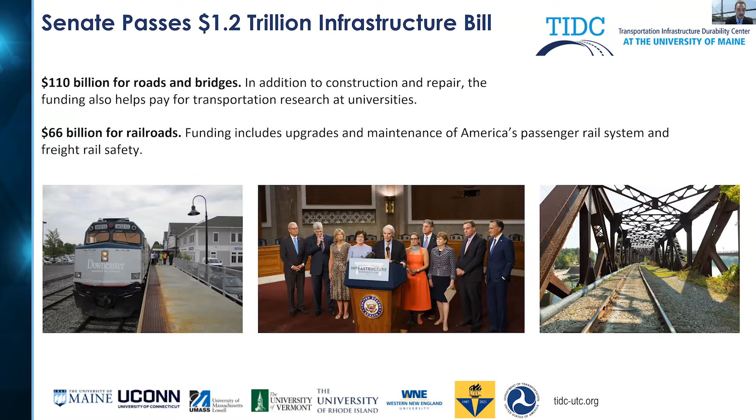As you all know, the Senate passed the $1.2 trillion infrastructure bill. As part of that, there's $66 billion for railroads, which would include upgrades and maintenance of America's passenger rail system and freight rail safety. Senator Susan Collins was key to doing that and getting a bipartisan group to move this infrastructure bill forward. So hopefully a lot of good opportunities for both roads, bridges, as well as the railroads as we move forward.

Our program today starts at 9 a.m. and ends at 4 p.m. Following my introduction about the conference itself and the work that the Transportation Infrastructure Durability Center is doing, we'll have a keynote talk from Sean Woody, on the FRA Railroad Research and Emerging Research Needs. Following that, at 10:30, we'll have a session on needs and challenges for the railroad industry. At 1 o'clock, we'll have a keynote speaker, the Deputy Commissioner for Con DOT, to talk about the future of passenger rail in Connecticut. At 1:30 p.m., we're going to look at a forensics and technical advancements panel on the railroad industry. The last session at 2:45 is on solutions and opportunities for railroads in the New England area. And then finally at 3:45, we'll have some closing remarks.

As we all know, all transportation infrastructure industries are facing unprecedented barriers as well as opportunities, particularly with the new infrastructure bill. But as part of that, the railroad is seeing significant challenges. We hope that this symposium this year and in future years will help focus the light on the needs of the railroad industry in the Northeast area and help us all work together to try to resolve some of these issues, both researchers, industry, as well as the railroad owners.

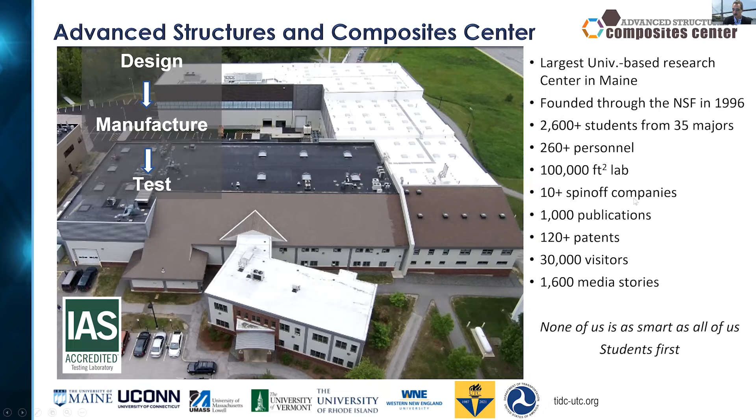Our strategic plan developed in 2020 is called GEM, and it's focused on green energy and materials. So our goal is to bring green energy and green materials to our region, to our country, and to the world. So we look forward to working with you on the railroad side to try to get there.

Examples of technologies developed in our laboratory recently is called the G girders, or the genius girders, if you wish. And this girder has been designed using life cycle in mind. Rather than designing the lightest girder that you can, or the largest bridge system that you can, we really looked at the entire life cycle from what does it take to fabricate the girder?

What does it take to transport it to the site? How do you erect the bridge system on the site? How do you maintain it during its lifetime, and how do you work on removing it at the end of its lifetime?

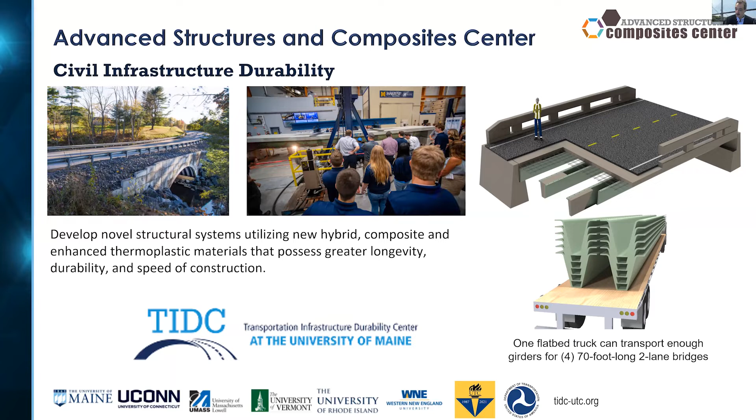The girder has been commercialized right now, and there's a company in Maine, Advanced Infrastructure Technology, that's building these girders and shipping them across the country.

Let's focus a bit on the Transportation Infrastructure Durability Center. That's a federal highway funded research center in Region 1. That's the center that includes the different states, the Northeast states, New England states that you see here.

And the center has currently 53 active research projects across all states, across all universities in the states. We're very keen on working with industry and meeting DOT real needs and taking technologies out of the lab and into the real world.

So we're very pleased that every one of our projects has a DOT technical champion, every one of the 53 projects that works very closely with our researchers to ensure that the research is heading in the right direction, and it has practical uses that the DOT can take away from and implement in their infrastructure systems. So that's a different way of looking at research.

This is where the customer of the research is embedded in the research process from day one to ensure that the results achieve their goals.

The Transportation Center is conducting transformative infrastructure durability research in 4 different research thrusts. The first is monitoring and assessment. So it's very difficult to figure out how you can enhance life if you don't know what you have, what the infrastructure looks like. So we're looking at next generation methods to assess the current infrastructure.

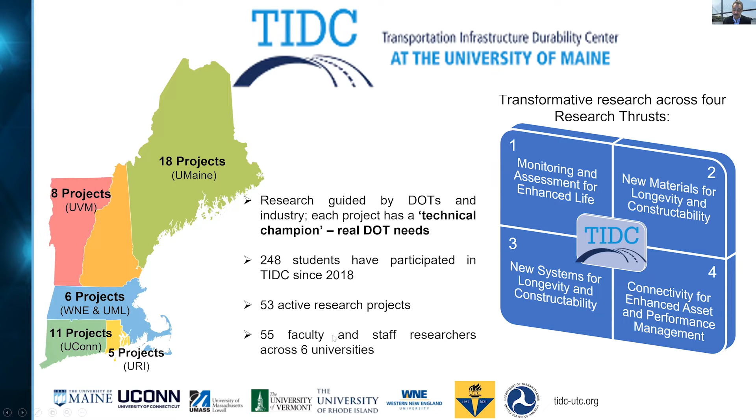So these are the 4 thrusts that we work on. We have 248 students across all these different states working on all these 4 different thrusts. And we have 55 faculty and staff researchers across 6 universities involved in the Transportation Infrastructure Durability Center.

I'd like to thank Dale Peabody, the advisory board chair, who's been absolutely fantastic and the heart and soul of our interactions with the DOTs, from Connecticut DOT, New Hampshire DOT, Rhode Island DOT, Mass, and Vermont DOT. We'd like to thank every one of the advisory board members.

In terms of the management team members, we have Jim Bryce, who's a program manager, who's spent his whole life in the real world, building bridges and constructing things. And he's coming in and bringing real world experience to the research that we do.

And then we have a variety of thrust leads in each one of the 4 thrusts that I've described. We have a thrust leader at the University of Maine: Dr. Bill Davis, Dr. Roberto Lopez Anido, Dr. Aaron Gallant, and Dr. Jonathan Rubin.

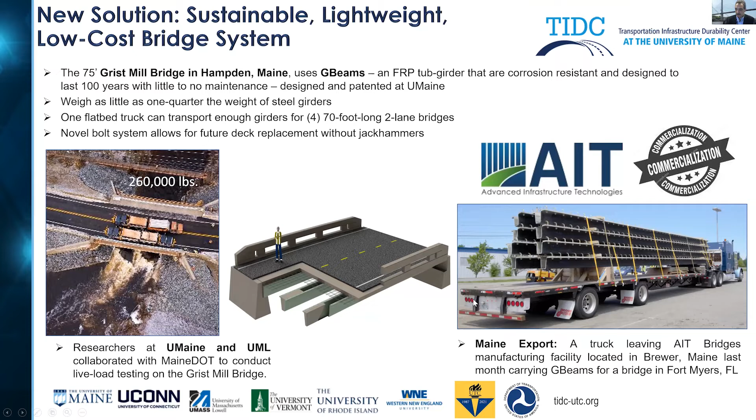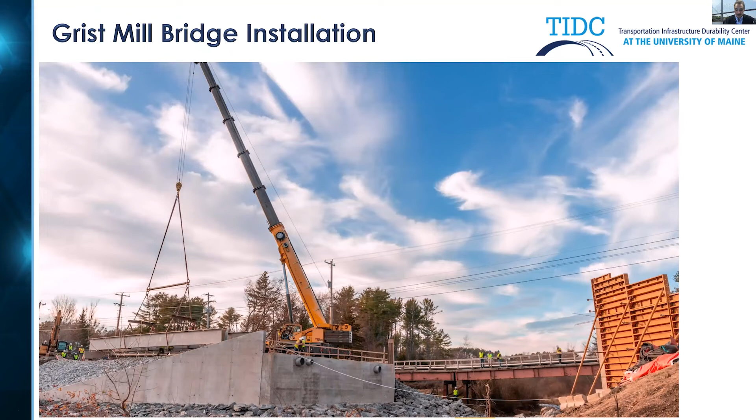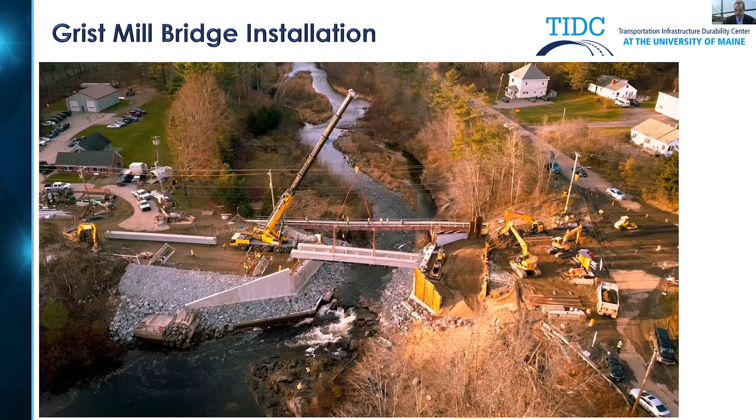And this is one of the bridges using this technology that was installed in Maine, in Hampden, Maine. It's a 75-foot long girder bridge. And because the girders are so light, the contractor was able to actually put the 2 girders together and lift them with a relatively smaller crane and place them across the abutments. These girders were all placed in a single day, including utilities under the bridge. And the bridge is designed for a 100-year life.

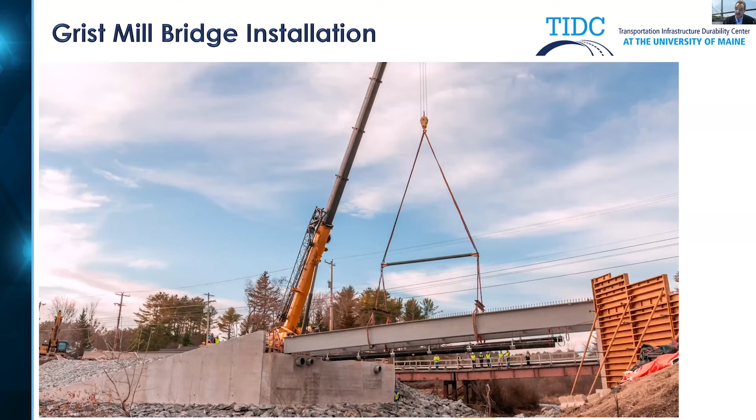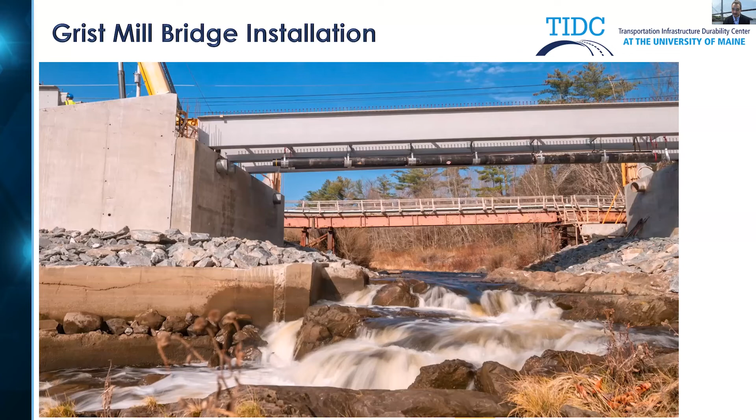As I said earlier, you can see the bolts that connect the concrete deck panels to the girders. So the idea is at the end of the life of the girder, at the end of the life of the concrete deck, you can actually unbolt it rather than jackhammer it off and put a new deck on. So this is an example of research taken from the lab and into the field and being used in real life. And I'm very keen in a transportation center to get real solutions that get applied in industry.

So I'm going to cover a few highlights of some of the work going on in each of our 4 research thrust areas. Our first research thrust area is monitoring and assessment for enhanced life of bridges - better methods to monitor bridges. We have 15 active projects in better ways to monitor and get data from our infrastructure out there. And that's an example of field load testing on one of the bridges that we have. Dr. Bill Davids is managing this thrust area.

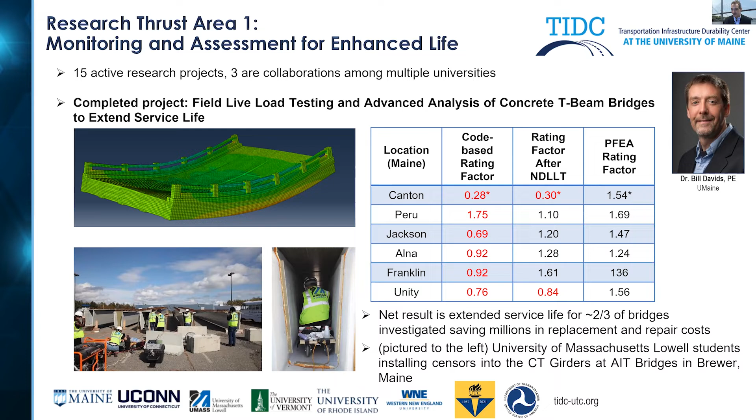One of his projects was to conduct enhanced rating methods for bridges. Bridges that otherwise, under a code-based rating, would have failed can be extended in life through more enhanced rating including load testing. Because of this work that Dr. Bill Davids pioneered here, we're able to extend the life of about two-thirds of the bridges that by code would have a failing rating factor. So this is a way to buy time for our DOTs as we find the resources to replace some of these bridges.

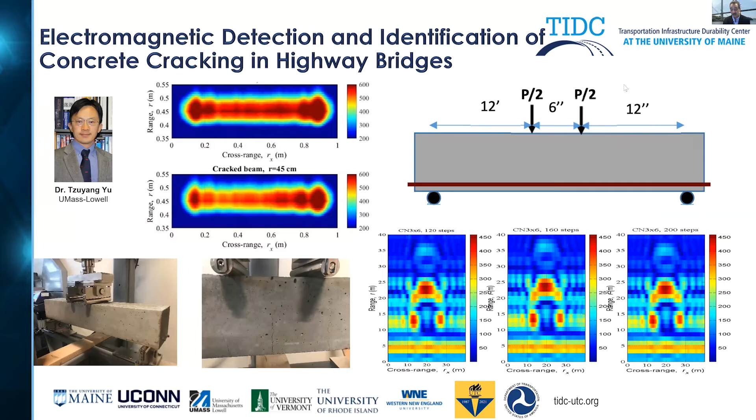This is another project done by Dr. Yu at UMass Lowell, looking at electromagnetic detection and identification of concrete cracking in highway bridges. Different tools are being used to better enhance and understand where the concrete cracking is taking place, using electromagnetic methods to do that.

This is another project looking at better understanding the in-situ properties of bridge assets. This is a distributed fiber optic sensing system for monitoring bridges, both railroad and highway bridges, being done at UMass Lowell by Dr. Wang.

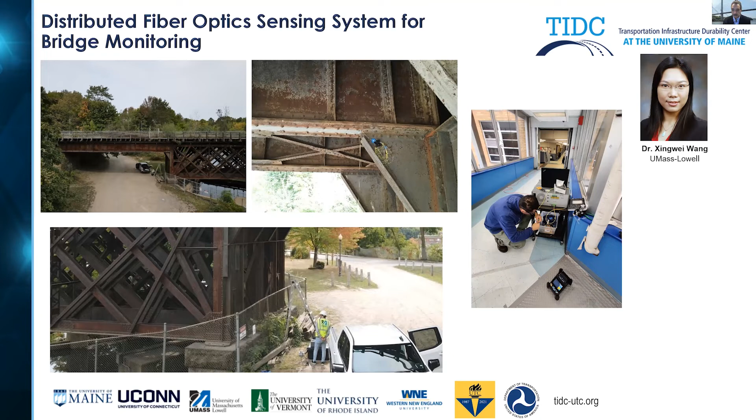This is research thrust area 2, which has 14 active research projects. One of them is being conducted by Dr. Roberto Lopez-Anido, Dr. Andy Goupee, and Dr. Berube at the University of Maine.

This particular bridge is the Penobscot Narrows Bridge. It has three pairs of non-corrosive carbon fiber composite strands installed in 2007. It's like a living laboratory where we're collecting data to compare the performance of carbon fiber strands versus steel strands in an environment like that. These carbon fiber strands are lighter than steel strands and can potentially enhance or increase the life of the stay system.

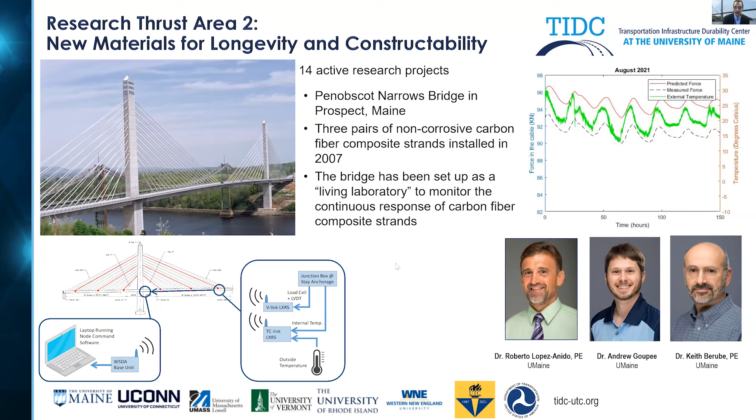This other project is also being conducted by Dr. Roberto Lopez-Anido and Dr. Bhandari, in collaboration with the Precast/Prestressed Concrete Institute with Rita Seraderian. The goal is to use 3D printing to produce precast concrete formwork or tooling for a variety of transportation assets. If you have complicated formwork needed for concrete, it may make sense to 3D print it. This is an example for a railroad project where we've designed and printed precast concrete formwork, and CNC machined that formwork for a very complex piece.

You can see the piece here on the upper right-hand corner that's been 3D printed, showing the complexity of the piece. This particular project utilizes 100% recyclable formwork as well. The major advantage of this formwork is that when you're done with it, you can grind it up and put it back into the printer.

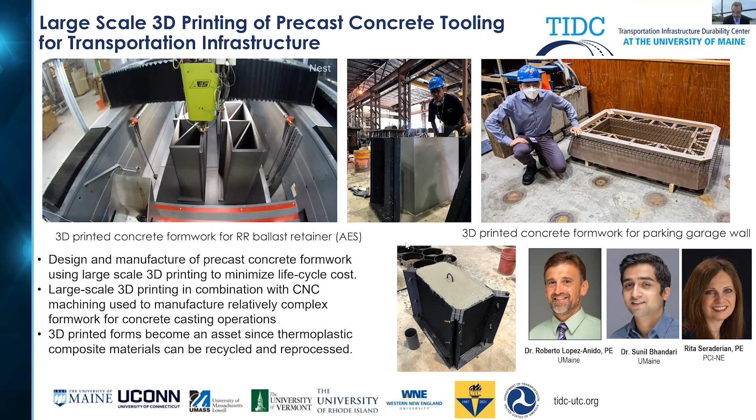This project is also being conducted by Dr. Roberto Lopez-Anido, Dr. Bhandari, and Alex Mann, at the Maine DOT. This project is the brainchild of Alex Mann and the Maine Department of Transportation, to install diffusers in culverts that use a Venturi effect to increase culvert capacity and compensate for losses due to liner retrofits. When you retrofit a culvert, you reduce the flow inside it, and this diffuser that we 3D print allows us to increase the flow through the culvert, but also reduces the outlet flow velocity to minimize erosion.

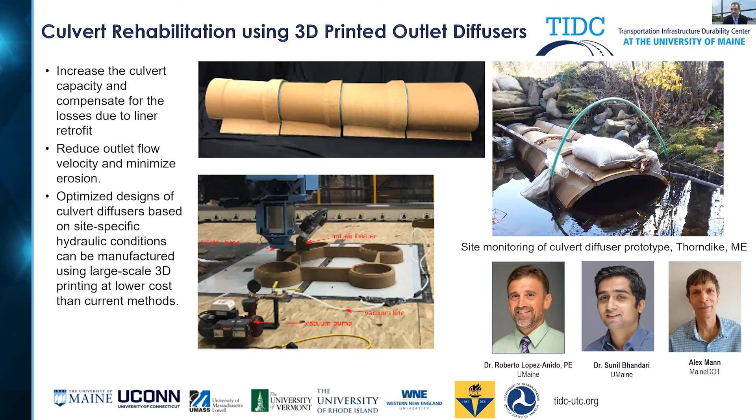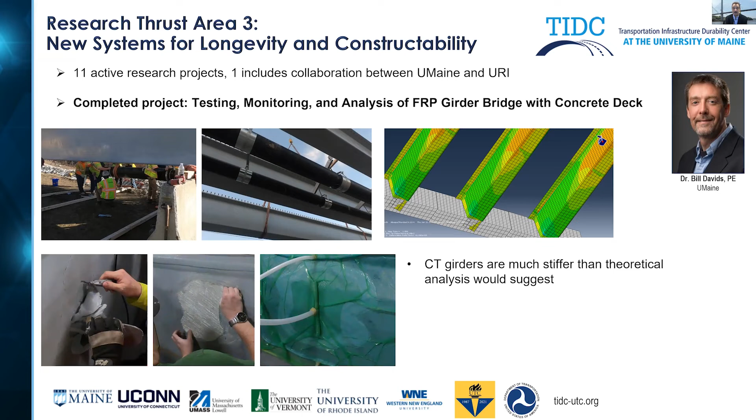Another project is conducted by Dr. Shin at Western New England University, to prevent stress-induced failures in pre-stressed concrete railroad ties. There's quite a bit of work ongoing there to see how we can enhance the longevity of concrete railroad ties.

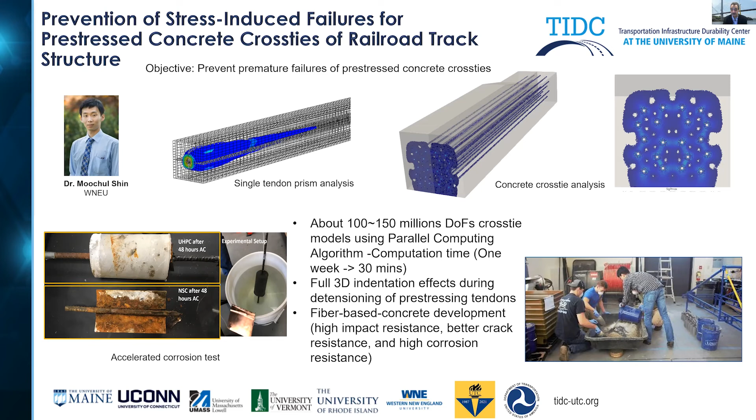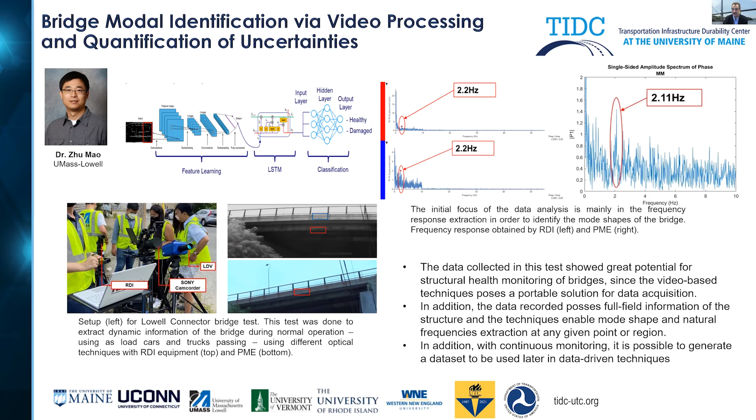This next project is being conducted with Dr. Mao at UMass Lowell, a modal identification method using video processing techniques to look at the durability or performance of a bridge. You can see in the lower left-hand corner a test setup at a bridge site where a modal test was conducted on a bridge during operation, giving us a baseline of information. You can come back to that bridge in future years and repeat the test to better understand how the bridge properties are changing over time.

The last research thrust area is enhancing connectivity, to enhance asset performance and management. How do we use new technologies, digital technologies? How do we use new network systems to better understand what our assets are doing out there in the real world? We have 8 projects ongoing there.

One of them is a highly automated vehicle and bridge infrastructure project. One is involved in cybersecurity risk assessment at UConn. Another project is looking at bridge stream network systems to identify sensitive structural, hydraulic, and landscape parameters for planning flood mitigation at University of Vermont. Very important projects, as you know, in Vermont.

There's been some significant flooding that has taken place, and that's been a big issue. How do we better identify which systems are sensitive to flooding and try to do something about them? That's one of the projects being done at the University of Vermont.

One of the projects at UMaine uses data from COVID-19 traffic patterns to better understand how traffic patterns have changed during COVID, and what that tells us about the impact on transportation infrastructure. We're also looking at road salt impact assessment at UMaine, and there's a project at UConn looking at proactive and intelligent risk management of infrastructure systems.